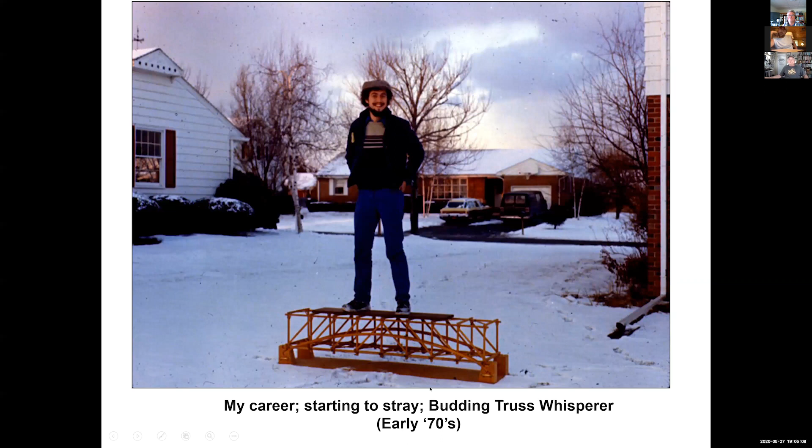So here you go, here I am. In the early 70s, going astray, becoming a budding truss whisperer. As I built this model, I turned to my left - I can still see this model. Almost 50 years later, I'm looking at that same model. I actually cut my fingers in the power saw building that model. That's why I've got them stuck behind me.

We used the model to demonstrate, and here I am in 1973, reinforcing a 100-foot long covered bridge in north central PA, still there. In Pennsylvania, when you needed a 100-foot long bottom chord, you didn't just go cut down a 150-foot tall tree like you can in Oregon. So you had to splice the timbers for the bottom chord.

If all of structures is challenging in making connections that are sound, it's particularly true in timber, and particularly true of tension connections. In this instance, these chords were all completely sound - there was no rot, they were well protected and covered - but at the lap splices, many of them had sheared. So rather than replace and dismantle this whole bridge, we simply reinforced them with these Dywidag threaded high tension rods, both inside and out of all four of both chords - four sets of rods running from panel point to panel point to panel point, covered it back up, and now you'd have to be a troll to see what we did.

So there I was getting started. Here I am, and this is the talk we're going to talk about tonight: heavy timber trusses. Let's define them. If they're not 20 foot or longer, I'm really not interested at all. And you're more likely, given the size timbers that people seem to use in trusses these days, you probably got a beam really anyway at less than 20 feet.

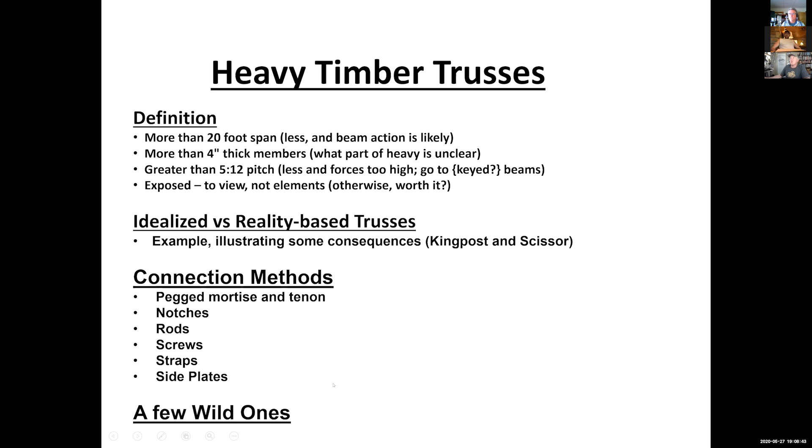I'm not going to say a lot of nice things about side plates, but I'll do what I can. I'll warn you about the side plate trauma. And then we'll talk about a few wild trusses.

So what about an ideal truss versus a real truss? An ideal truss is one where all the members are simply axial members. There's no eccentricities of the joint—all they feel is axial compression or tension, and they meet and end at every joint; when you connect them, all the members end at that joint. It's usually a pinned, friction-free joint.

On the other hand, our real trusses—a lot of times it's very bad to have all your member axes intersect at a spot. It makes the joint needlessly tough and unduly weakens the member that's catching the other diagonals. So a lot of times we use eccentricity to good effect, but it is not the ideal.

Most of the time we'll see at least continuous top chords, or rafters as I'll hear them called. So you have continuous members, which are not the ideal. I'm not saying ideal as in platonic—I'm saying that this is the simplest model.

Our joinery can carry, depending on how we frame it, all sorts of moments and shears inadvertently or on purpose. If you use side plates, this is where you can really get yourself in trouble, because instead of a small friction-free pin joint, you've got this big plate, which can be big compared to the trusses and members, and can transmit all sorts of moments and shears that you didn't see coming—and you're not going to detail for it correctly, and you're going to get in trouble.

We also describe our members as weightless. Obviously, nobody's doing weightless members except in SketchUp. I said everything stands up in SketchUp so far—when SketchUp starts getting gravity mode, I'm probably out of work.

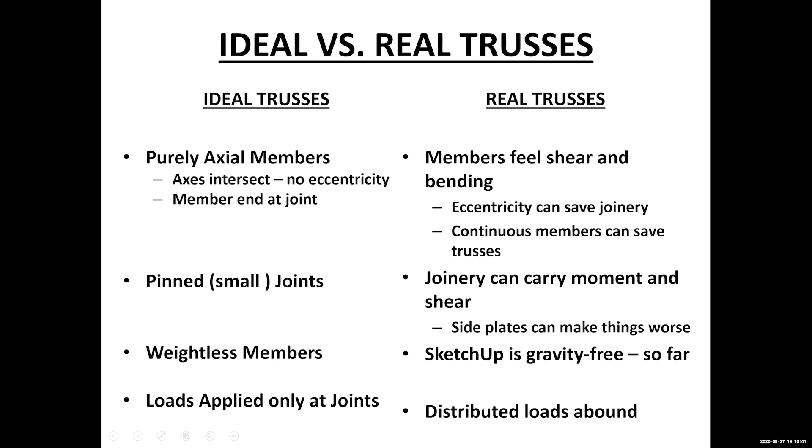Finally, classic truss analysis assumes that the loads are applied only at joints, not in the middle of members. That's the only way you can keep them purely axial members—applying loads only at joints. We violate that almost all the time, but I'm going to show you what happens when you do distribute loads in various ways. So let's look at some trusses.

This is an ancient truss, probably somewhere in England—this is a Janet Kane slide. I'm saying this thing is just barely a truss. I mean, it's got a big triangle, so sure, that's trussy.

These don't meet together in a triangle. There's sort of a frame—we'll see these again. But more than anything, we also have a strut that looks like it's been there for a long time, so this is probably as much a structural handrail or a top plate of the transverse wall. But the location of these diagonals can play a crucial role in how forces are transferred throughout the truss.

So let's look at this. This recently came in—this is from one of our members, a longtime member of the guild and former president. I'm not going to mention his name, but Scott Murray might be on the call. He sends this to us knowing full well this is not an idealized truss, but it sells, and who can argue with what sells? So he wants us to engineer this for what sells. I tell him, Scott, this is inefficient. He said, I understand, shut up and do it. I said, fine, Scott, here we go.

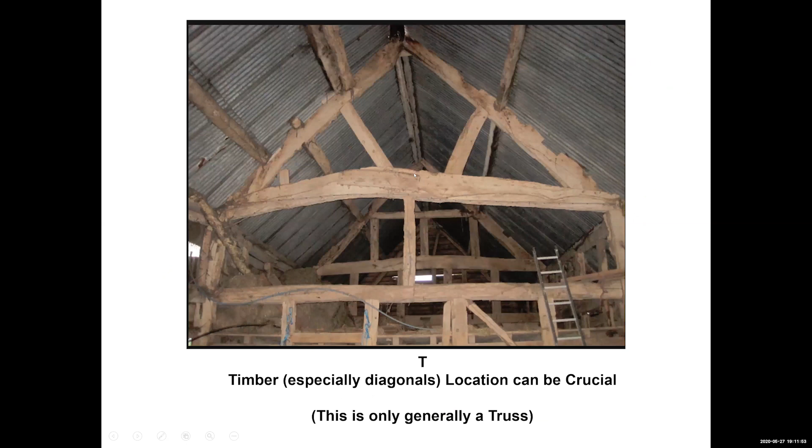So what happens when you put the struts perpendicular to the rafter, not at the midpoint—you put them at the rafter, you leave a longer span down here than up here. And what happens when you separate them from the middle? You've got a king post or king rod, unlike the previous one. You have a king rod here to handle the tension imparted by the compression in these struts, but you've got a lot of shear in this bottom chord.

As a matter of fact, for this to work—he sells them at 8x16, so that's good in Canada and Ontario, that's great—they do need 8x14, and because of the increased bending on this side versus that side, we needed 8x12s for the same loading.

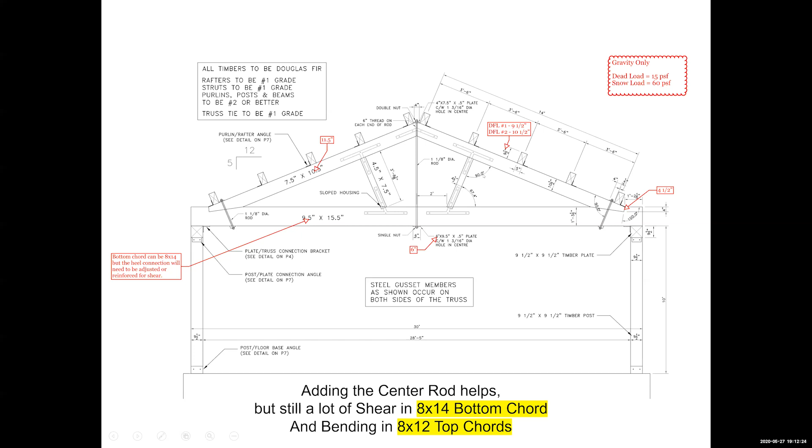On the other hand, just for interest's sake, I said, well, what happens if you did this? If you flattened out the diagonals so they're basically at the roof pitch, so they come down here, they take off the shear in the bottom chord and support the top chord evenly. What happens? Well, all of a sudden, because of the more even bending in the top chord, they can go from 8x12 to 8x10. And the bottom chord, without all that shear—it really is just a tension member—can go from 8x16 to 8x10. Big change just by a modest tweak, and all I did was flatten out the pitch.

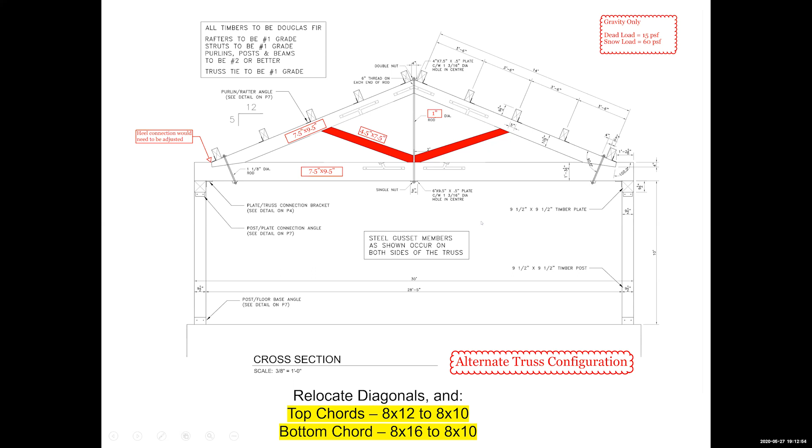Okay, so you bought 2 feet longer diagonals. You can send me the bill. So here you are—this is a big impact and shows you how the orientation of the members really matters a great deal. So this is what I would call an ideal king post truss.

Some of the things going on: this is a 12-12 pitch, but that's also a 45-degree brace, so the brace is parallel to this, which means when it comes off pretty close to the bottom of the king post, it hits the top chord roughly at mid-span. You'll also notice it does hit the king post—we're going to talk about this in a second. It doesn't hit down in here, which would be a concentric, non-eccentric connection, but it would also mean I'd be shoving the bottom chord off the end of the king post, and I would have to detail this. Sometimes you see big through-tenons in here and straps around the outside and all sorts of stuff to hold a lot of tension between here and here.

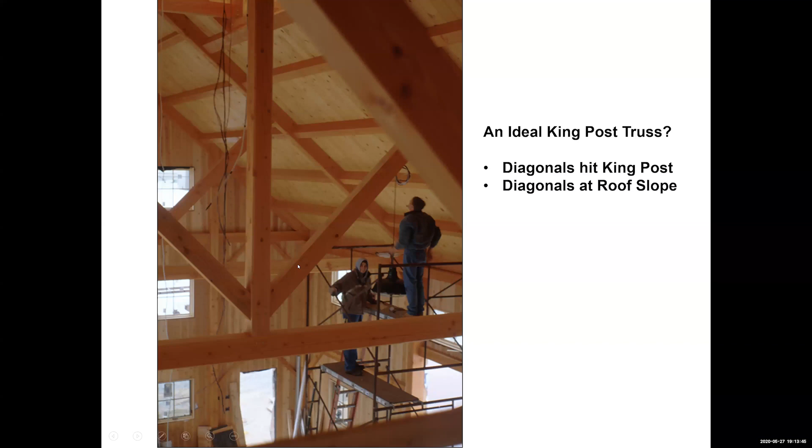It's only because sometimes people will put these diagonals down in this crotch here, and that shoves this bottom chord off there, and you have to detail accordingly. Or you can go with fairly simple joinery if you keep it up here. Once you've said, well, gosh, once we're going to get the tension—or the bending—out of that bottom chord, then you could actually just go to a simple rod across here.

And this is another slide from Janet. This is a rod, because all it's really doing is handling the tension of the king post upper part of this frame. I'd point out this frame is really an interesting frame. This is a rod—you've got to keep it in tension, and we'll talk about that. You have to either use a flat pitch, so there's a lot of force in this rod and it doesn't get reversed by wind loads going across the top of it or by earthquakes shaking it up and down. This cannot handle any compression—it's only a tension member—or you can put a lot of heavy load on it.

We'll talk about one where we did that. I love this frame because it's called dogleg framing. This is what I call dogleg.

This is a moment frame: a link of a rafter, a post, and a long brace, imparting lateral stability to this frame. This is a dogleg, meets a king post truss, and not only that, it does it with floating posts. Notice how they floated the posts off the walls. We don't need no stinking posts on the walls.

We get them out here free. The kids can run around behind them. You can put bookshelves and all sorts of stuff out here. It leaves you room for a really great joint here.

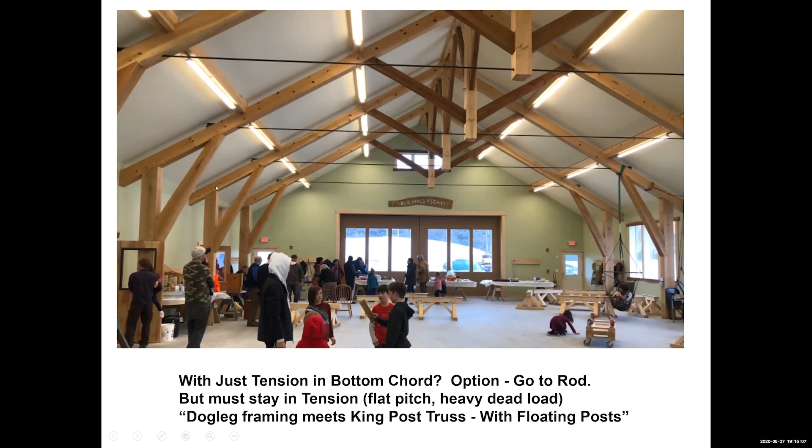Instead of having to cut this rafter off right where there's a lot of prying induced by this brace, rather than having to cut this off because it ran into a wall, I can keep going over. All of a sudden, this joint is ever so much stronger now because I've got decent end grain on the rafter.

So if you really take this to the extreme, we don't even need to connect the king post to the bottom chord at all. How bold is this? I looked around and I've seen this in a slide somewhere, like Macedonia or someplace, from 4,000 years ago. Somebody did it and got away with it for a couple thousand years. I could not find that slide, so I had to use this one.

But that just goes to show you, if you detail this diagonal right, hit the king post and keep it in parallel with the roof pitches, there is really no tension here unless you start hanging heavy objects. If you start hanging heavy objects off here, swings, lights and stuff like that, then you better detail that for some tension, because that's a long span as a beam. It's fine as a tension member, but it's a long span if it's a beam.

So now we're going to get into comparing various details, and this is where Janet really kicked in. We're going to talk about detailing trusses and what the impacts are on the force transfers among them. So we're going to stick with a 36 wide.

Trusses are getting interesting at 36, 12-foot bay, pretty classic, 9/12 pitch, 15 pounds dead load over the slope. We'll show you that. 16 pounds wind load distributed, we'll show you that too, but it's completely secondary. I'm really here for the gravity loads. Then we'll talk about snow load.

I just picked a nice 40 - or actually Janet picked a nice 40 - but what we're really going to be looking at are the different ways that you can apply the load to these trusses.

A lot of us use common purlins between these things at 4-foot centers. We'll show what happens. Some of us just put up heavy, thick boards or 12-inch SIPs that can span from truss to truss across that 12 feet. Heavy decking can do it. Some people put lumber, 2x6s or 2x10s or 2x8s - I guess I'd use 2x8s at 12, 16 inch on center.

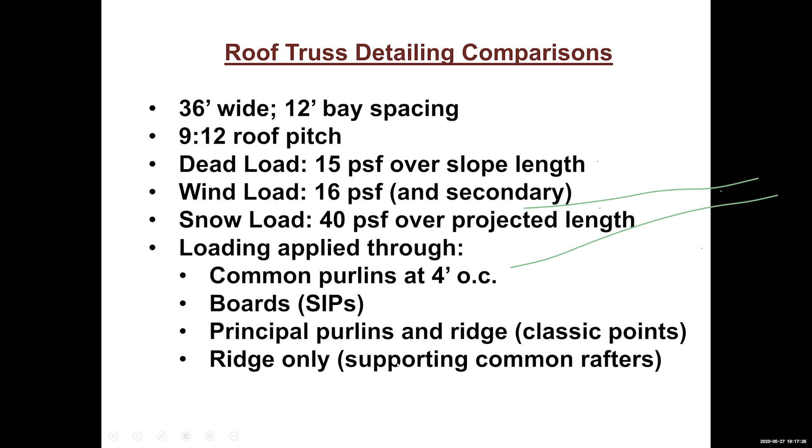So here's the classic king post. We're leaving the braces in, even though they're probably as much trouble as they are good. But there it is - we're going to have an 8x12 top chord. We didn't quite match the pitch, but close with 50 foot or 50 degree. It's not a 45. There's your diagonal.

Notice I downsize them so that this is not a flush joint and this is not a flush joint. I like to do that a lot. Sometimes I'll even make this an 8x10 spun the other way so that you're looking at the 8-inch face, so this bumps into that. There's lots of games that I play to avoid flush joints, which don't hold up very well. But we're going to see dead load distributed over the timber.

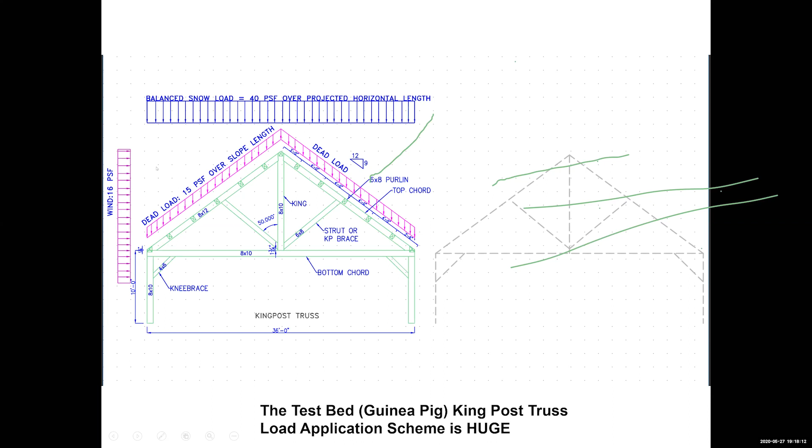We're going to see snow load distributed as it was if we're on the ground but hitting a roof, and then we'll look at wind load, which we're doing the simplest of wind loads, just a projected area above the half point of the wall. So let's see what happens.

So this is if you use classic purlins. You'll see if the purlin's on 4-foot centers, even one down here—see, this is about half of it because this is 4 feet, so only 2 feet of it goes directly into the post. This is a little less up at the king post, up at the ridge, because these two are a little closer than 4 feet to the peak. So the spacing isn't perfect, but you'll notice that most of these are small 2.5 kip loads.

And what we need in order to have the top chord handle this is an 8x14 top chord to handle bending and axial compression, the combined stresses in this chord. We need an 8x14, we need an 8x10 down here, an 8x10 for the king post.

Notice that the king post has 9 kips of tension. What's that from? I've got 7 kips in the diagonal propping the sag out of that top chord, 7 kips in this diagonal propping the sag out of the top chord. Those are in compression, propping the top chords up, pushing down on the king post. So these rafters, these top chords have got to hold that king post up with 9.3 kips. And we'll talk about that joint eventually—how we're holding that king post up with this rafter. And then the bottom chord needs to be an 8x10.

So there you are, that's classic. Pay attention to this: the top chord has 20 kips of compression, the bottom chord has 15 kips of tension. 20 kips of compression in the top, 15 kips of tension in the bottom.

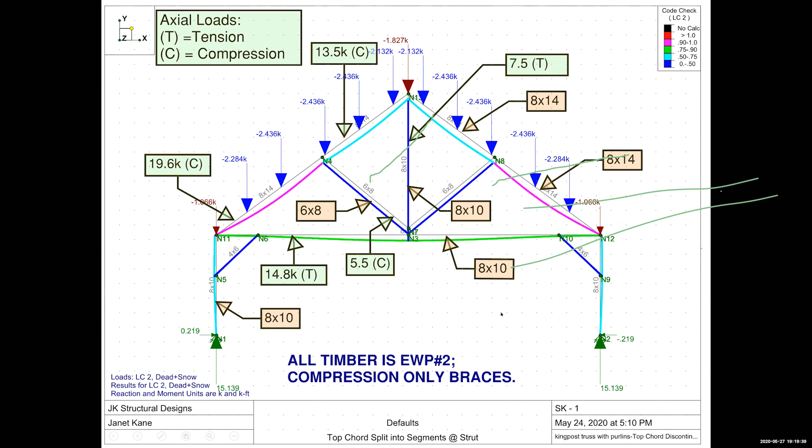So this is one I've wondered about, and finally talked Janet into doing this for me. This is really for geeks. What I had her do is say, what is the big deal about this chord being continuous to that chord? What if we put a hinge here and didn't carry it continuously across?

It's kind of interesting what happens—your bending concerns aren't, because we didn't quite flatten out the roof pitch, the bending concerns are now only down in here. And you'll notice also what happened, which I looked at, and because I'm such a timber geek I can just stare at this sort of stuff.

You'll notice I've got 5 kips of compression in this strut when I do this, but when the chords are continuous I've got—where is it? There, 7 kips of compression in that strut. So why, what—I put a hinge in here, I cut this into 2 separate members, and my load goes down here? Well, actually yes, because this is a continuous span across here. So part of what this compression strut is doing is not just taking the deflection out, but inducing flat curvature in there. You're also pushing this straight in here.

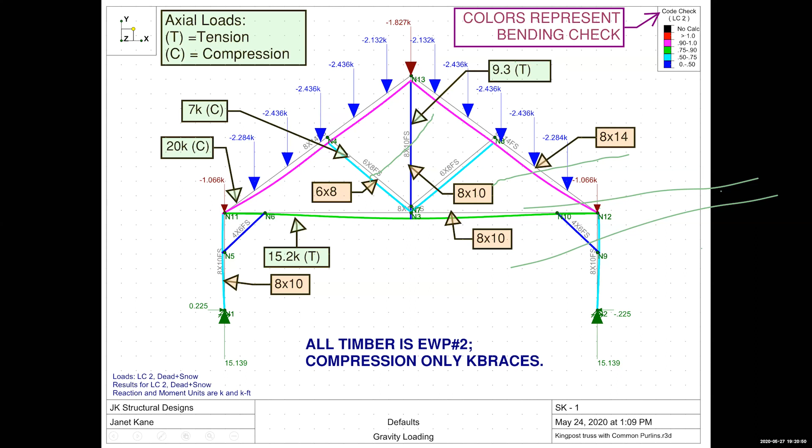Another way to say it is a continuous span has a 5/8 reaction instead of a 1/2 reaction in the middle, for you engineer geeks. But the fact that this is continuous across the support means there's more force in the support than in this instance, where it's 2 simple spans across there. The force in this goes down. You'll notice the tension here and the compression here, almost no change at all—all it really did is a little bit of change right in here. So that's enough of the geek stuff.

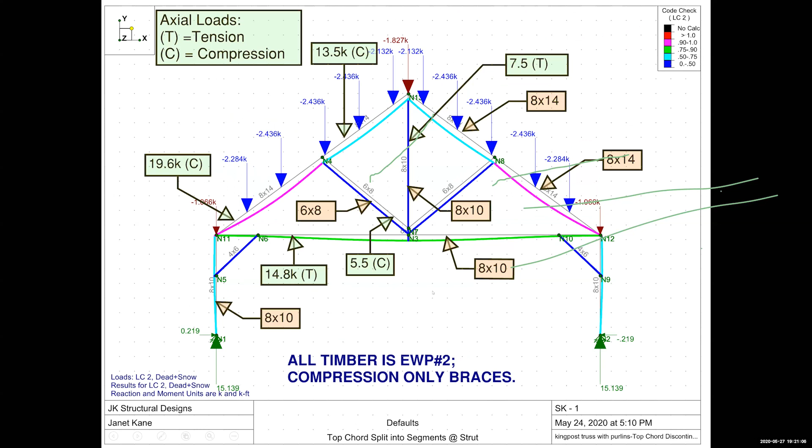Let's go to the next one. This is where we've got either panels or boards or something in here distributing the load. And look what happens here: in order to get this top chord to work with this load spread all the way along here, and that's both the dead load and the snow load up here, this top chord had to go to 8x16.

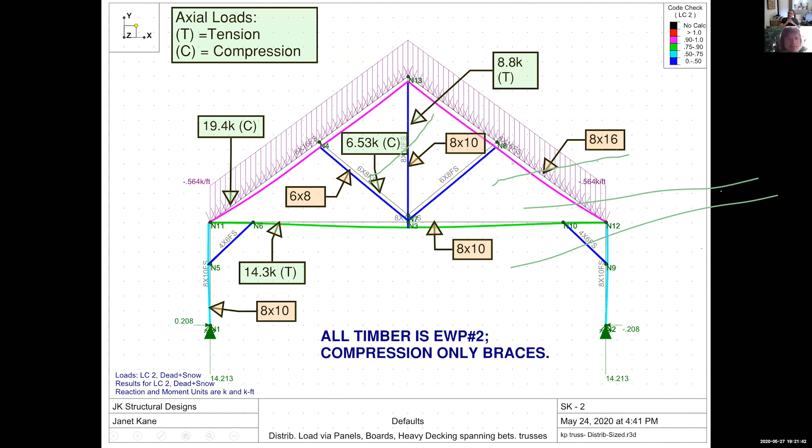You'll notice that the compression and tension didn't really change, it's still about the same, 20 and 15. But this had to go up to an 8x16 to handle the extra bending. So what's really paying the price is your top chord if you're distributing these loads this way—if you're using purlins and boards, and what was the other one we had? Purlins, boards. We're getting to the next one.

Okay, and then how about if we do the principal purlin? This is a principal purlin. Well, there's an eave purlin—look right away, the eave purlin is taking a lot more load now than when the purlins were at 4 feet on center.

It took 1 kip away. When we put the purlins here, here, and here, you'll notice we got 3 kips that are completely off the table anyway. They're not getting to the truss at all. Then I locate them, locate a ridge up here, the common rafter or boards go up here, or panels go up here.

This is a pretty ceiling, that's my favorite ceiling, and then I have this big load, but it's right here. Look what happens. My top chord, the king post can only be an 8x8. The top chord can go to an 8x10, and the bottom chord can be an 8x8. This is the most efficient way to load this truss.

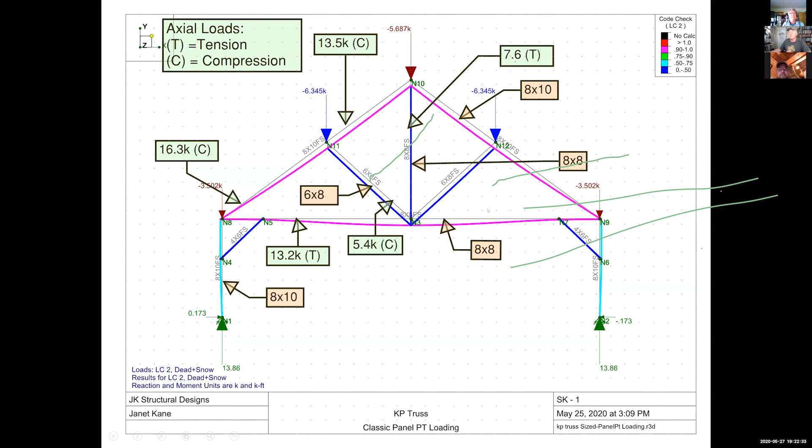The next step out, it's really the same truss, but we're going to have a ridge beam on top of this thing, so the rafters span from the ridge down to the eave. What happens there, a lot of load just goes right to the eave right off the bat. So by now, instead of having 20 and 15, now I'm down to 11 and 9. Well, that joint just got an awful lot easier to load.

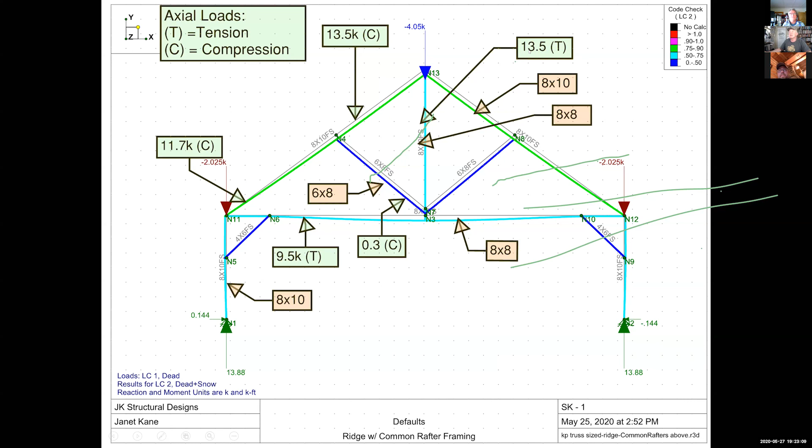You'll notice, and we could talk about this but I'm not going to, you'll notice you still have quite a bit of load in the king post, quite a bit of tension, because these are still working pretty hard.

Okay, so let's talk about these - I don't count on these, but they are handy for holding things up while the real lateral load components are being installed. So what about these knee braces that jam in here?

Well, if you put a realistic side sway on this thing, if you really are building a dance hall or a church, and you're putting the braces in here, say I've got a tension brace, some sort of knee brace that can handle 4 kips of tension. That's a lot - that's 2 big pegs and end distance to help develop it.

Then it's still going to sway an inch sideways, probably more than anybody wants it to do in a wind mode. If, on the other hand, you're more realistic and say this thing fails - look at it, I don't bend that post anymore, but I doubly bend this post, it's in trouble, a lot of trouble - my side sway goes up to 1.8.

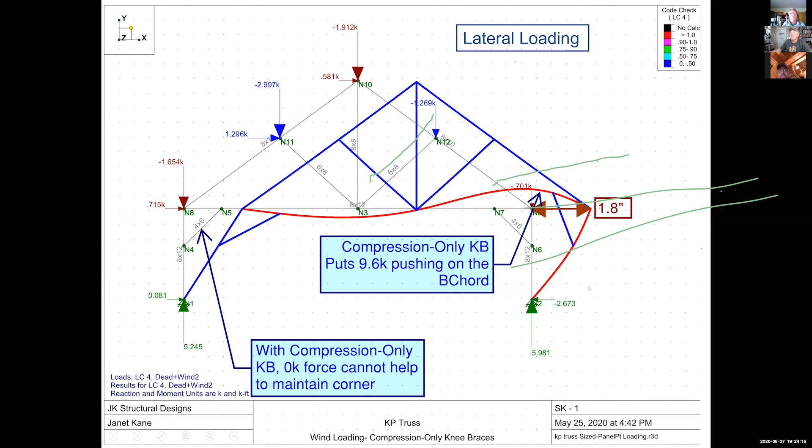So I'm not saying don't put these braces in. I'm just saying that you're working the post hard, and you're also cranking on a bottom chord, which might not be big enough to really do a stiff job of it. So you can be breaking bottom chords with these braces too, if you really think they're carrying the load stiffly enough.

So what about scissors? How bad does this get? I tell people the minimum force in the bottom chord is going from here to here. If you raise these, if you break it into 2 separate bottom chords and raise them up all the way so they're parallel to the upper chords, the tension goes to infinity.

So if you're halfway there, if you're from 0 to 4.5 to 9, you're halfway to infinity. Well, infinity over 2 is still infinity, right? So obviously I'm lying to you, but you are not being efficient.

Look what happens when we use these same spans, the same spaces, same loads. Watch what happens. It used to be 20 in the top chord and 15 in the bottom chord. And before I leave this, let me say this about this king post.

We'll see why, but this - if you have to leave this out for whatever misbegotten reason, brace yourself for trouble. This king post is seriously in tension. It's what makes this a truss - 1, 2, 3, 4 triangles - and not some frame which bends these poor bottom chords and bends the top chords.

Oh my, I have done it. I am here to tell you, if you have only one thing you take away from this talk: do not allow yourself to get talked into just leaving that member out because somebody thinks it looks cool, or wants to run a big duct down the middle or something.

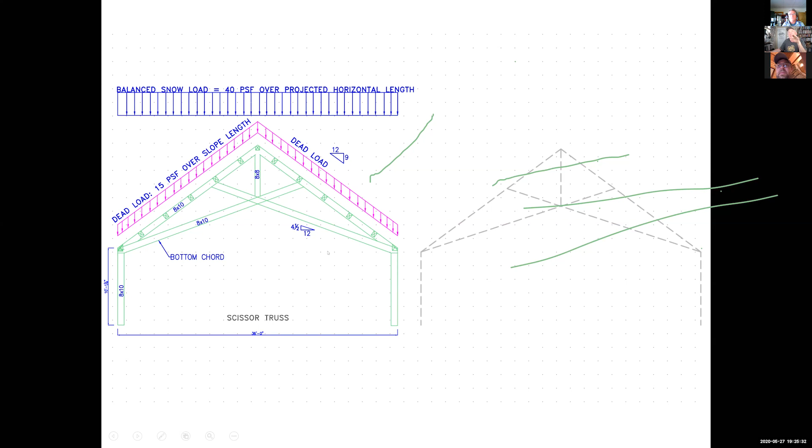So here you are - what happened to that bottom chord? The top chord was at 20, now it's at 34. The bottom chord was at 15, it's almost doubled. We've almost doubled. We're not halfway to infinity, but look at that.

And then the top chord and the king post, that used to be like 8,000 pounds or 8 kips, it's tripled, because now it's handling compression from these weird sticks, and this is the crux joint.

This is the tough joint. We'll talk about this joint. This is a tough scissors joint.

Sometimes I'll leave these timbers out to make it just a 3-way joint. If you have these in here, you've got 5 members coming together in one spot, and they've all got a lot of force - this one's in tension, this one's in compression, this one's in tension, this one's in compression. This poor timber changes from big tension to some pretty good size compression, and just on the other side of that, there's a lot going on in this joint.

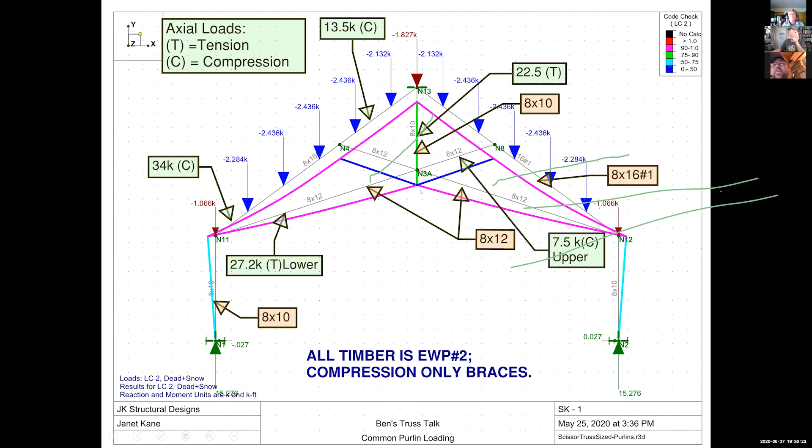Take this joint very seriously - that's one of the ones you've got to pay attention to, the king post tension. So that's enough about members and orientation.

Let's start talking about the connection, because trusses, to some extent - if Dennis Markham's on the call, there he is - these are the 72-foot long single bottom chord pieces of the Proctor Academy in New Hampshire.

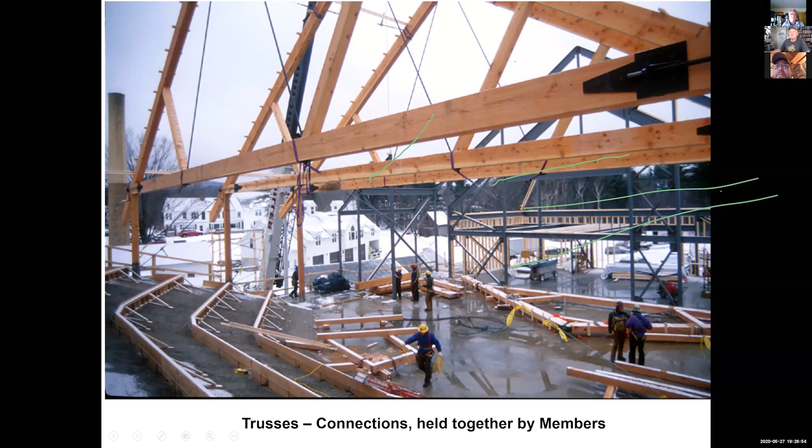They promised us we'd be raising this thing in summer. This is when the GC finally called us, but you've all been through that story. So let's talk about connection methods.

So there's mortises and tenons - that's what most of us got in here, that's what I studied in graduate school. But they really have limited capacity, and whether they actually justify the damage they do in a well-engineered, well-designed truss is running pretty efficiently. When you start taking housings and tenons, mortises and pegs out of there, you're really doing a lot of damage.

We're going to talk about notches. These are classic - notches are timeless, but they are compression-only members, and we'll talk about that. They do weaken the timber at the notch, and craftsmanship is involved.

You need nice bearing, and bearing changes is the problem with dealing with wet timbers that are going to dry in place, because the angles change. So it really relies on nice craftsmanship.

Some of these will have cast iron standards to sort of industrialize and standardize the notches. You'll see some of it, and we'll see some of these later.

Rods, I call them priceless because they're tension only. You can look at it and tell what it's doing, what it should be doing, and all it can be doing - it's not going to be fooling you. It's not going to be in compression. You can tell when. I love rods for their clarity of vision.

Screws have only been a recent innovation. So far I mostly use them to reinforce and repair and hold stuff together while we're tipping it up.

The simpler your load paths, the better. These are a straightforward load path - mortise and tenons aren't, but a notch is very straightforward. Rods are pretty straightforward, screws are remarkably straightforward, these straps are very straightforward. They only do one thing and they do it well, and they're not going to surprise you by carrying things like side plates, which are fraught with issues that can transfer all these unforeseen things.

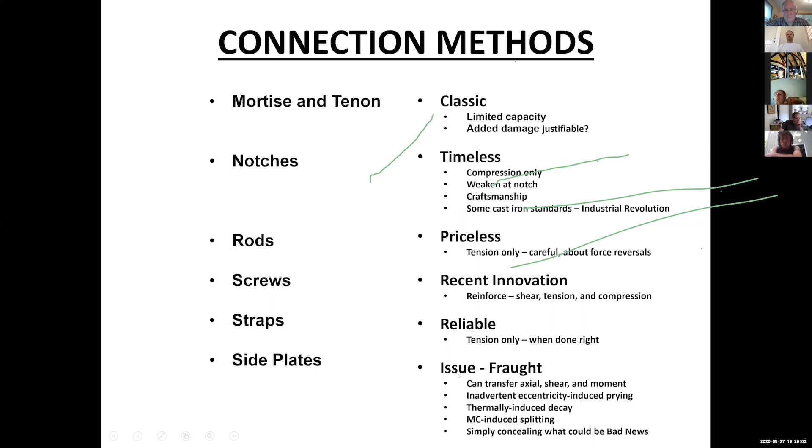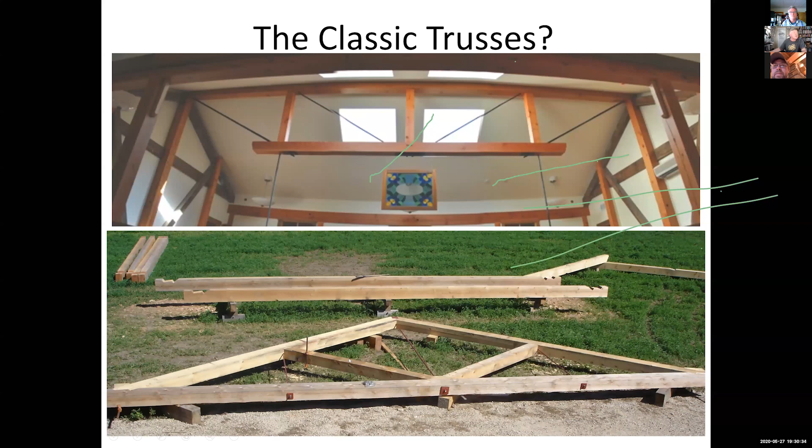Very elegant joint. So this is connection basics. This came out of a text, one of the texts I keep right here. I can grab this thing. This is one I used when I taught undergraduate and graduate level timber structures courses. It's Hoyle's Wood Technology in the Design of Structures. It is so focused. It was the most design oriented of what I consider the American books.

And it points out this crucial, simple thing that I see people miss all the time. Here's a truss, here's a truss. When it comes down, it sits on a wall. Top chord, bottom chord, same compression, same tension. People don't look at the joints. What's the difference here? In this one, the top chord sits on the wall. In this one, the bottom chord sits on the wall. Is that a big deal?

Let's look at how the force is transferred between those two members. When it's located like this, this member is simply sliding by this pin, and this is loaded parallel. The top chord is loaded parallel to the grain. All it feels is that.

But on the other hand, the flip side of that P down here, when this connection feels the support, the bottom member feels the support, but it also feels this angled load from this pin. This pin is parallel to the load transferred to the pin, parallel to this one, but it's at an angle to this one. On the other hand, when I support the top chord, and now the reaction is here, there's only simple tension here. This is just the simplest tie as it can be in this member, and that member now feels the load that's parallel to the grain, and this member feels the load that's at an angle to the grain.

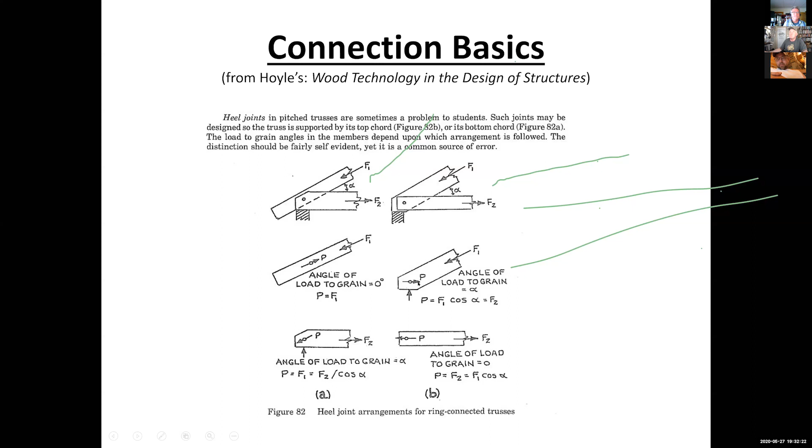If you don't think that's the difference, you haven't been paying attention. You've been getting away with stuff, if you don't think there's a difference between whether this is loaded at this angle or this angle. Now, when you use lots of little connectors, it's not as big a difference. When you use lots of little screws, or a lot of little pegs, they don't really behave that differently when they're loaded perpendicular to the grain versus parallel to the grain, but you're not doing that much when you're using bigger pegs.

This is a fascinating joint. This is a double stepped one, and it's double stepped into both. It's a sandwich. You're looking at 6x16 rafters, and you're looking at 6x18 that sticks out through the top, and that is split ringed.

This is split ringed, and this one is split ringed into the two bottom chords, and then these two notches go across all three of these members, the three in the top sandwich and the three in the bottom, and then they're bolted together, and there's a pin right down here at the concentric point where the thing is supported and the lines of action of these two chords meet.

This is a fascinating joint. It really is. It combines this, and this. How load sharing happens between here, that's a good question.

I would certainly want these to be split rings and not shear plates if I wanted this one to carry load, and see that looks like it's a split ring or a shear plate. The problem with the shear plates is they let this centerpiece slide a little bit, so this isn't going to be uniform bearing across these two patches. But on the other hand, split rings are much stiffer. Load transfer is much more immediate, and you would have more even load sharing between the three sandwiches when they get these two notches.

Now, what about these two notches? These are crucial notches. Each one has to be nicely parallel to the other one. Has to be a nice uniform bearing, not tight here, tight at a corner. Not only that, but all four faces have to be carefully cut so that you get uniform and simultaneous bearing across all these faces.

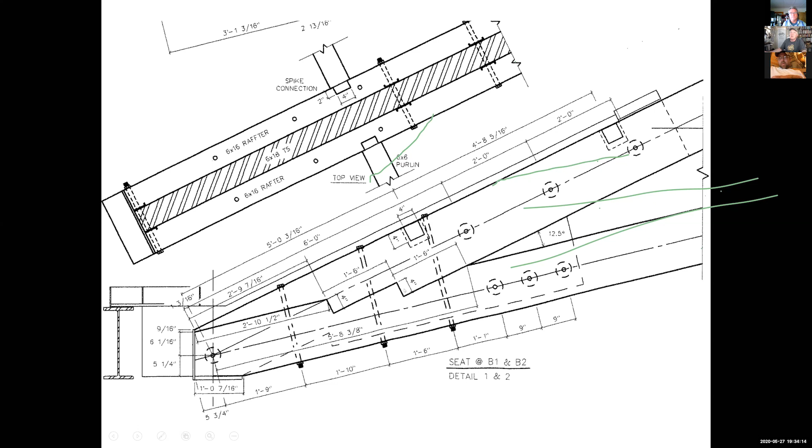A good trick, sometimes what I'll do is undercut one and drive a pair of wedges in there, drive them in hard. Now the problem is that crushes, so the load sharing doesn't stay even. But if I have any concerns about the capacities of the timber framer to do it, I'll have them put wedges in one of these.

Ben, may I interrupt you here? We got a special request from Janet that you remove the green lines, it appears to be distracting. Yeah, I know, I can't. I don't know, okay, maybe they don't show up on any screen, so I don't know how they got there. Can I apologize to Janet privately later? Well, we'd rather it were public, but yeah, okay. All right, I'm sorry, Janet, I don't know where they came from. Sorry, babe.

So let's talk about this. This is a plan, this is a scissors truss, and they just slapped this on the top chord and the bottom chord, and said well, 6 bolts is fine. This has probably got more load in it than this one, so why is this and this? Who knows? The problem is we don't know what the load transfer is between them, because this is an eccentric load path.

And I'll show you why this is an eccentric load path. So this piece of steel is being twisted out of here, and why they didn't just cut a simple little notch in here and be done with this thing and some screws, I just don't get. But we don't trust notches in engineering school, apparently. So there's a PE seal on this thing.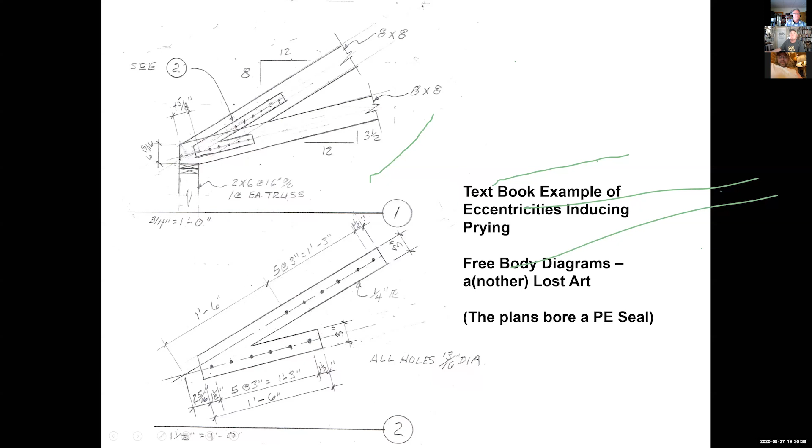Notice it could be, if I brought the plate down here and grabbed it and had it bear right on the reaction, maybe you could do that. If these plates actually bore on the support too, then it'd be more complicated, but in some ways a much simpler steel strap. Then I'd have compression, tension, and the support reaction. But they just put these on here all the time. And just because it's cut into a fancy elbow doesn't make it the same thing as if it's just a big old triangular plate. So here you are.

This is what's really happening: let's say it's supported in a way that this is in pure tension. Well, these are fighting it exactly, they are at least in balance, so the thing isn't going sideways. But that is an eccentricity, because the center of these 3 bolts misses the center of action of these 2 bolts, and that's the eccentricity between this compression shoving this way. So this is simpler but more accurate, but this isn't anywhere nearly the case either.

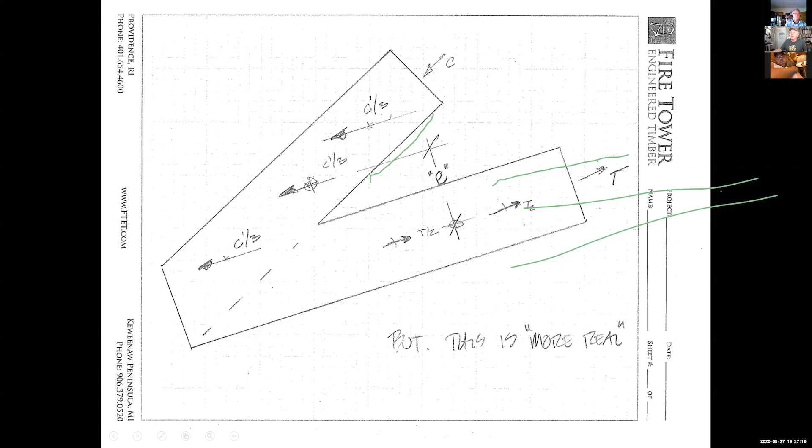Each one of these things is going to have a perpendicular component to keep this thing from rotating about either here or wherever you choose to rotate it. There's going to have to be perpendicular components, which are basically, another way to look at this: if you push hard on this, you're going to pry this out of the end.

Now, one of the ways you can do that is to move this pattern of bolts down here so this line of action passes through the center of line of action of that. Then all of a sudden you've gotten rid of that eccentricity, and we'll show you how to do that. But if you're stuck sticking these things all on the upper side of this line of action, you've got eccentricities.

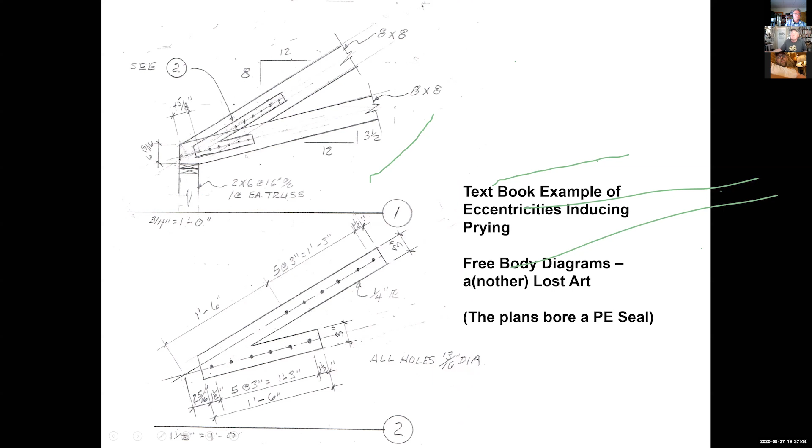So here's what we did on this one. Here are pins. These are separate straps. That's a bolt that bolts this strap to this strap. These things are really held in by dados, so that's a dado bar set into a dado face, with 2 bolts that go through and clamp, and a pin here. When this thing is centered, there's a pin here, a dado bar here and a dado bar here. So this line of action of that tension, that scissors truss, passes through the centroid of the line of action of these 2 dado bars.

So this is using straps. They look like a cover plate, but this is really a pair of straps designed similarly, an overlap set of strap - I think that's a Y and a vertical. This one's not so critical because it's pretty symmetrical innately. But this is a way to get rid of the prying in here and use straps. I kind of like the way it looks. This is not for everybody.

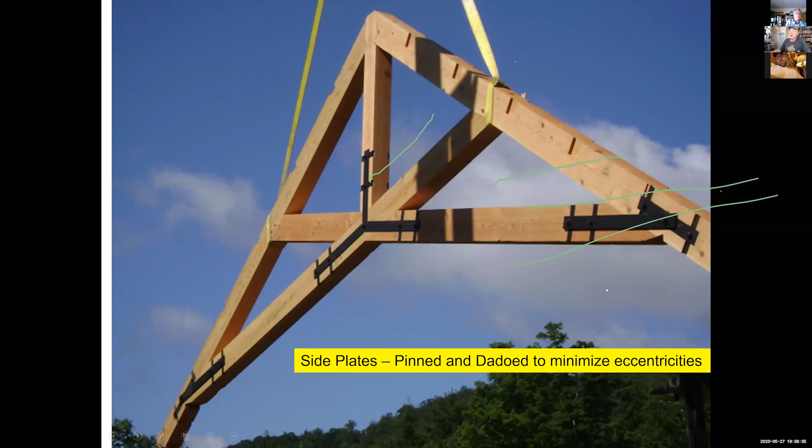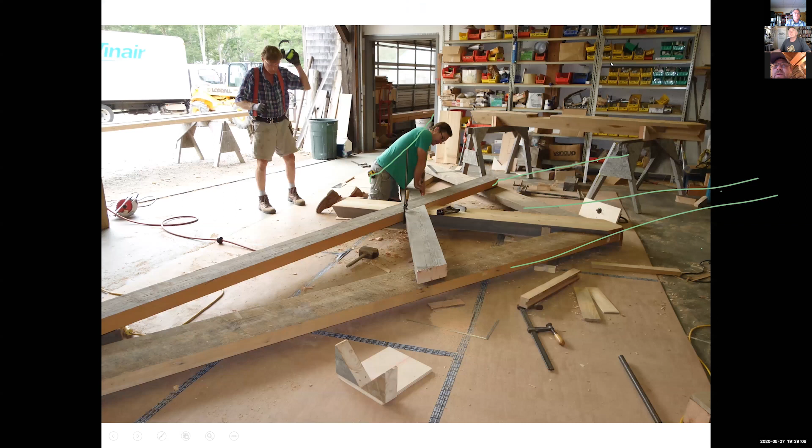Oh, am I doing things by... no, that's not it. I wondered if I was inadvertently making marks. Whoa, I'm going the wrong direction. I was trying to make that green mark go away, Janet.

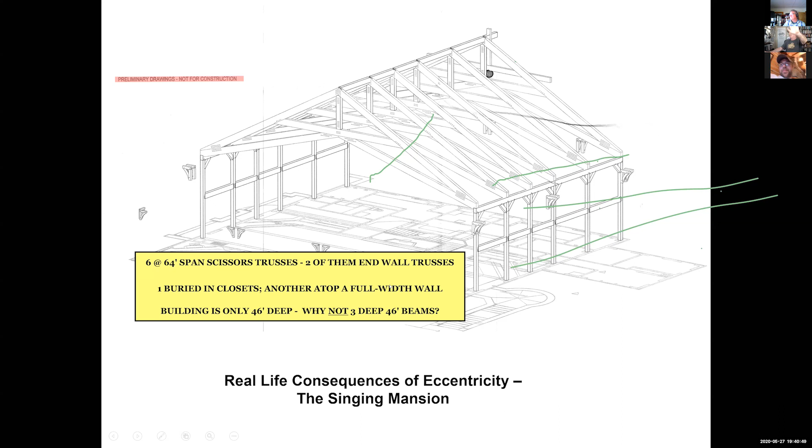But the thing was, here's what this joint looked like: 66 kips. I mean, this is a lot of force. 66 - you know, we've built houses that don't weigh 66,000 pounds. All right, so we've got houses out there shoving through on this steel plate, and it's full of pins. These are all 3/4 inch pins going through a single plate. I think it's only a 3/8 inch plate too.

This is eccentricity. The load, most of the normal force here, is in bearing along this face, but there's a big amount of 60 kips of shear going along here. Notice the line of action here is 10 inches away from the line of action there, so this plate is being spun counterclockwise too. This isn't a whole lot better, but that's a lot of force.

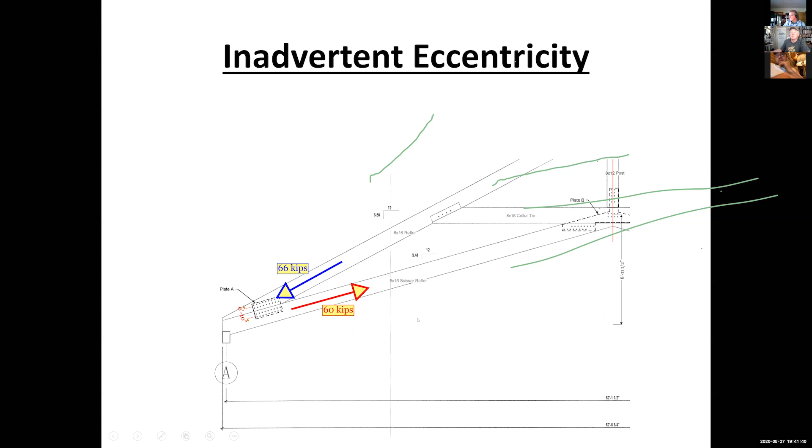This thing creaked and groaned and snapped and cracked, and it was 8 years old already, so it wasn't drying anymore—things were moving. So what do you do? We tried to come in with screws, but you couldn't get to them, couldn't come up with long screws buried in walls, couldn't come through the top. It was a beautiful clay tile roof, so it had to be face-mounted stuff.

These face-mounted straps look like individual screws. That looks like a big, long screw in tension keeping this thing from sliding and sliding. So that's the plan—they're on the inside and outside, both ends, I think 3 or 4 of those trusses. This was early in the days of these new European high-tech screws, so...

We thought, let's just go see them. Besides, the client could afford this, and we really wanted to know what we were doing, so we built up some models. We ran them at different loads to the grains, simulating these screws, and put them into the same steel plates. We did this for a couple of reasons: we wanted a proof of concept—these things are worth like 2,000 pounds of screw, come on—so we wanted to see that we believed that.

We wanted to see what a failure mode looks like. Mostly I wanted to be able to tell the builder and anybody else who comes and looks at this thing: if you start seeing these heads rotating this way, you've got a problem. We wanted to leave a track record of what the failure modes look like. The builder who was going to install them came down and learned a lot about what kind of impact tools were needed, whether you needed a pre-drill, what to expect, how long it's going to take, how heavy these plates are going to be, and what these screws are going to feel like.

Then, of course, the engineers had a lot of fun, and we made some money on this job. So there it is—this is undoing. Unfortunately you can see the pins; they plugged the pins, they were small pattern pins. It wasn't a bad idea, a bunch of small connectors, it was just way too few of them with way too much eccentricity.

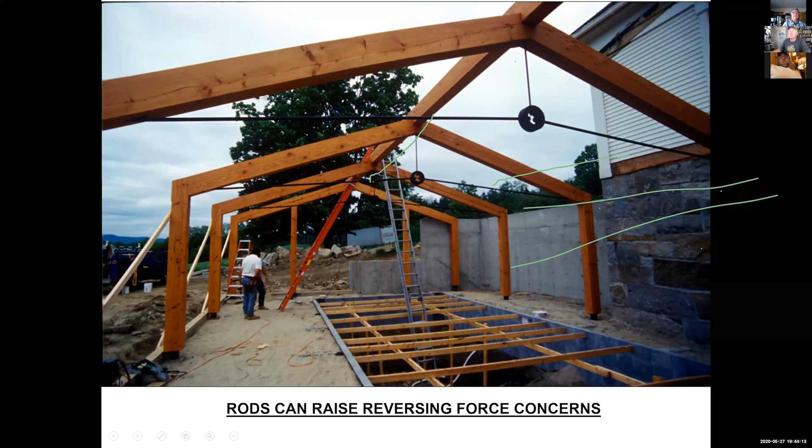But if wind came in and lifted this thing up, these things would rattle and clatter, and it would be nasty. So let's think about this crux joint—here it is. Everybody wants these things flush, which means a half dado here and a half dado there, which means eccentric load paths around the dado, or it means you've removed at least half of the capacity. It means all sorts of compromising to these two timbers. But then I've got this serious tension—how do I get this tension into this?

How do I get this tension around these dados? I have drilled a slot down between the two dado faces, then this needs to get better.

Notice this was using up a bunch of leftover recycled planks that South Mountain had out. For a couple of years, I was coming up with ways to use their overly optimistic purchase of a lot of recycled Douglas fir planks, heavy planks. Here we are. So this is what I call a clasping king post.

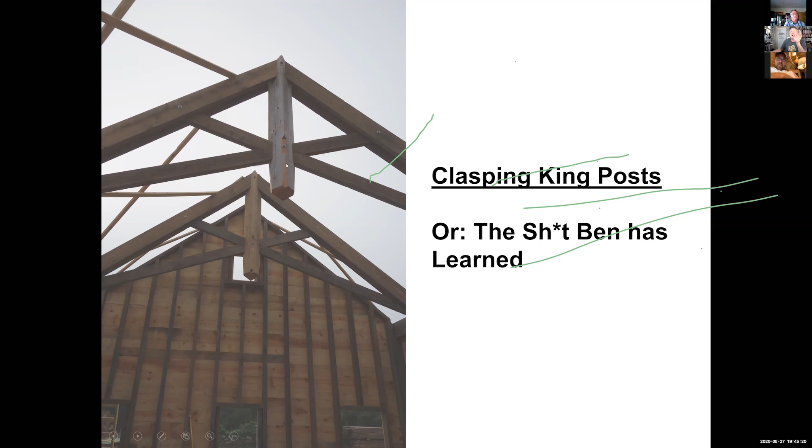We've got a simple bird's mouth up here, but then this clasp goes around, it's split, and you'll see this in a second. It's split so that this is actually compression, nice cushion compression bearing on the underside of this. We're not damaging these dados any more than they already were. So there they are, and there's the split king post.

You'll see there's a dado in here where that's half a plank wide. The other one is half a plank wide. And so that's a simple bird's mouth down in here.

You'll see this joint in a minute. And then all the compression is on these two surfaces. So let me shut off my cell phone.

So here are the two together. After a while, I get bored with all this prismatic stuff, so I talked them into spinning the king post 45 degrees just because we could. And so there it is. They're clasped, and now they're going to trim this off.

We had a contest for what kind of detailing to use on the bottom of the king post here. A crucial amount of this gets hung below to handle the compression, on the other side to deal with the tension, and then a bird's mouth up here.

Let's talk about these, which I consider scissors trusses, really. They're just a different kind of scissors truss, smooth, with curved bottom chords. Used to be I didn't have to worry about these things, but then architects found themselves with CAD drawings, and suddenly it got pretty easy to draw a 28-foot diameter radius circle.

This is a scissors truss. The good news is that because this thing is radiused up, you generate more interconnection along here. Instead of when this is a straight member, that shear plane, the interacting shear plane, where you want to make your connections, you have more of it to work with. That's good news. The bad news is this is a curved member.

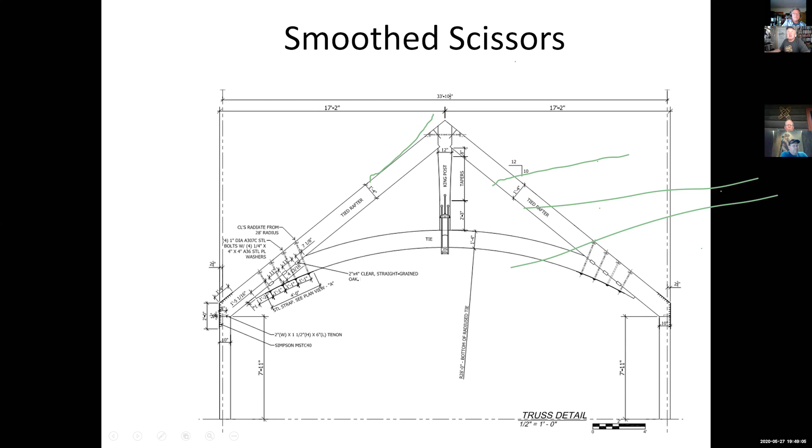So then what do you want to do? You want to do as minimum damage to this one piece bottom chord as possible. So the tension here, I could have taken a rod through here, or we could do, oh here it is, how to grab a curve.

By the way, if you don't recognize him, that's what's his name? Norm Abram, thank you. And this is his own house. And that's Tedd Benson. Don't do this at home, disconnecting the cord. Later, in the act of taking the shrubbery down off that same ladder, trying to emulate Tedd, he slips, the ladder falls out from underneath him, he falls off the ladder, hits the staging, rolls off the staging, and hits the floor. Another story.

So here you go. So how do you do the minimum damage to this curve? By not even taking a rod, not even anything more than a locator nub tenon. So you take this beautiful piece of wrought iron that looks sort of like a crown on the king post. Anyway, it goes down past the curved bottom chord and turns what is a tension connection into a compression member, because now these two wedges bear on the other side. So these things are sized so that you don't crush the wedges and you don't crush it, so they're wide enough you're not crushing.

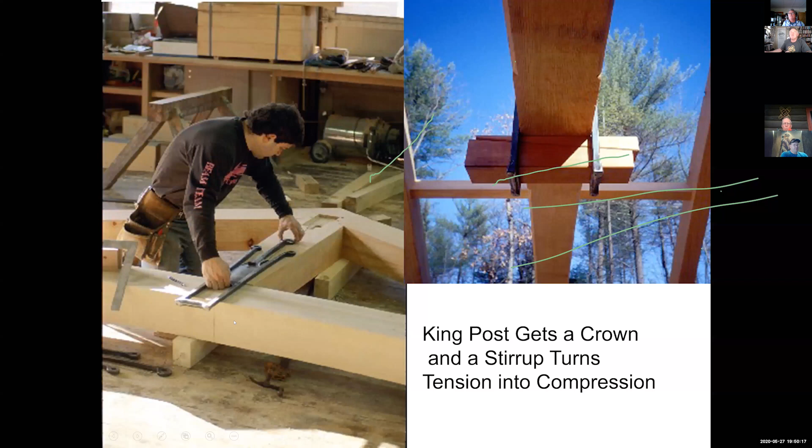And they're also deep enough so that they can handle the bending, because this is uniform load in here and two point supports over here. So these wedges are pretty exotically loaded in crushing and shear and some bending. So here you go. But it is a way to get away with this curved bottom chord. There it is in situ, kind of pretty.

And then what about this at the end? You know, there are these elongated shear planes where we can transfer the big tension to the big compression. And the shear keys are about as good as split rings and shear plates. They keep the load instead of a big curved cover plate or a big old strap. You keep the eccentricities down. It's just taking tension here to compression right there, tension right here to compression right there. So minimum amount of eccentricity, innate eccentricities in your load flow of your connection mechanisms.

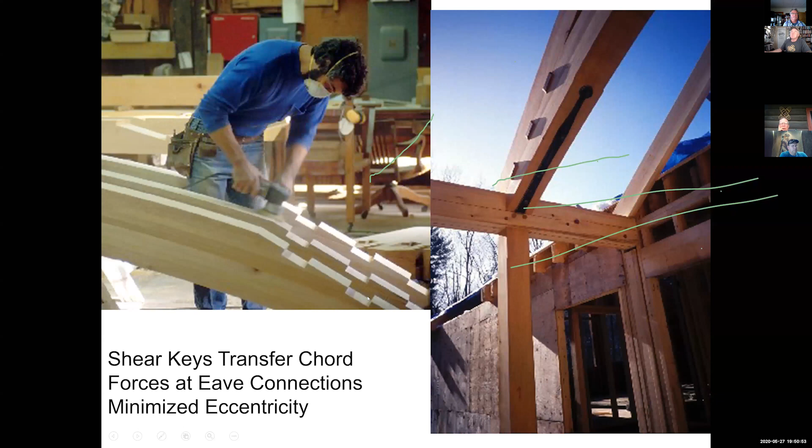And then lots of pegs, and then it's supported in a way here. So this is on the support, not this. This is whittled away on the underside, so this is a pure tension. You don't have as many of them as you do in here, because this is in compression. Although this is not symmetric, it isn't too bad. The line of the eccentricity, that's the line, the center of this bolt, the peg, and this is all pegs through the sandwich. So if you're going to do it, you can do it with some grace in here.

Wood is more compliant than steel in many ways, both in temperature and in moisture. And you can drive interference fit pegs, so the pegs are tighter than bolts. It's sandwiched, so it's hidden, and the tolerances are relieved. So I don't have to worry about whether the pre-drilled hole in the timber is going to hit the pre-drilled hole in the steel. We drill them all at the same point, clamp the whole thing together, drill a bunch of holes, and drive a bunch of pegs. Feels pretty familiar to everybody on this call.

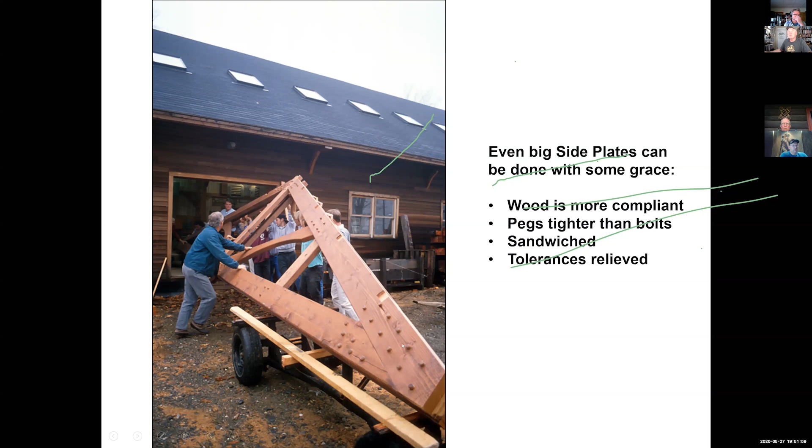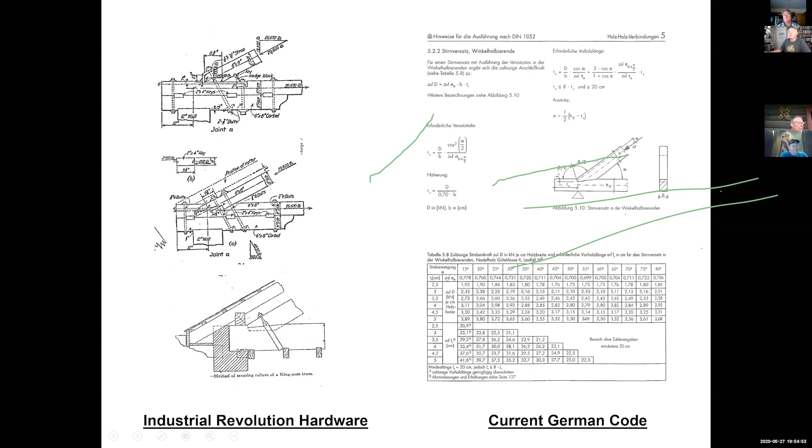So let's talk about this. This is all new—it's been bothering me long enough. Finally, I said, okay, here I am. Let's figure this out. Let's talk about bearing versus friction in joints.

I can't tell you how many times I've got trusses, king post trusses, 12-12 pitch, and we'll use a simple bird's mouth down at the bottom. Then all of a sudden I'll get up to the top, and it's the same force, the same angle of attack. And all of a sudden everybody wants to use this sloped shoulder.

I say, why? I mean, this works so well down here. It's not hard to pull together. You can slide them sideways. If worse comes to worse, you can put them in and then drive the king post down and get this to fit. Just because you're going to pivot this in, this relies on friction.

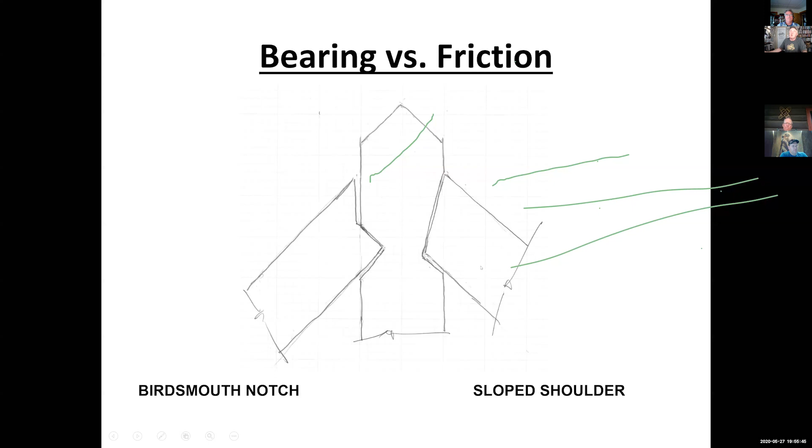Ultimately, at some point, this relies on friction. Let's talk about friction—this is a slope shoulder used as a bearing joint. Now, I see it more recently than I do in old timber trusses. The Industrial Revolution didn't do it. The English don't do it. The Russians never did it.

It's really us who are doing this stuff. So here we are, so what happens? Let's talk about the coefficient of friction.

This is a fascinating topic for Brungrabers, because my father is still alive. He's a PhD structural engineer, and he took a sabbatical once, worked two or three years for the Bureau of Standards and developed a slipperiness tester—the National Bureau of Standards Brungraber Mark II slipperiness tester. This is really it.

He took a bearing pad and tipped a weight over, measuring the angle at which the thing slipped. So what we're talking about is: at some point, if this thing were flat enough, you know it's not going to count on it for slipping. The question is, where's the point between perpendicular and where everybody knows it's just going to slide?

Where is that point? Well, it turns out that's been an issue of interest for a long time. We have this thing called the coefficient of friction, and what it is, is a simple ratio.

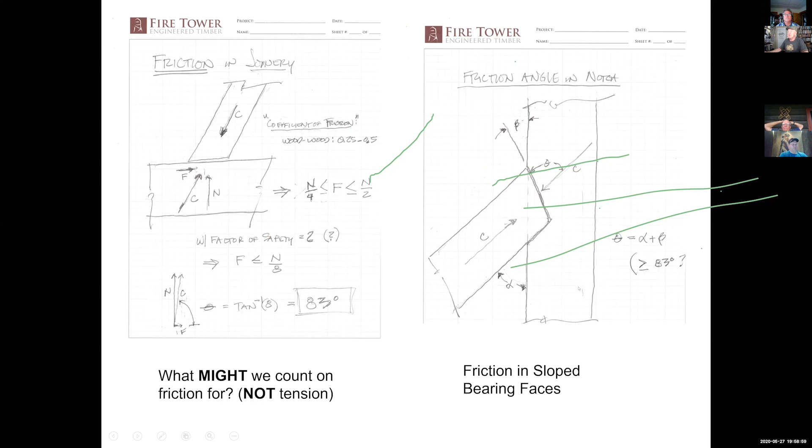I'm sure this is some function of that too, whatever—you'll figure it out. Anyway, alpha plus beta has got to be bigger than 83 degrees, and I'm convinced this is true. So you go back and look at your slope tenons, add this number to this number—if you're above 83, you're fine, or feel free to go mess with your factor of safety, help yourself. But check these things out and see if you are indeed counting on friction to an unreliable extent.

So let's talk about some stuff that I see more and more. I don't see this in the Industrial Revolution. I don't see this in the 100-year-old Russian stuff. I see this in modern timber framing.

I understand why people do this—they say, well, it's triangles, it looks like a truss. As a matter of fact, I've done this. I've even done this, and I've certainly put my stamp on a lot of it, but I've got to tell you that I'm concerned, and we pay a lot of attention to this joint.

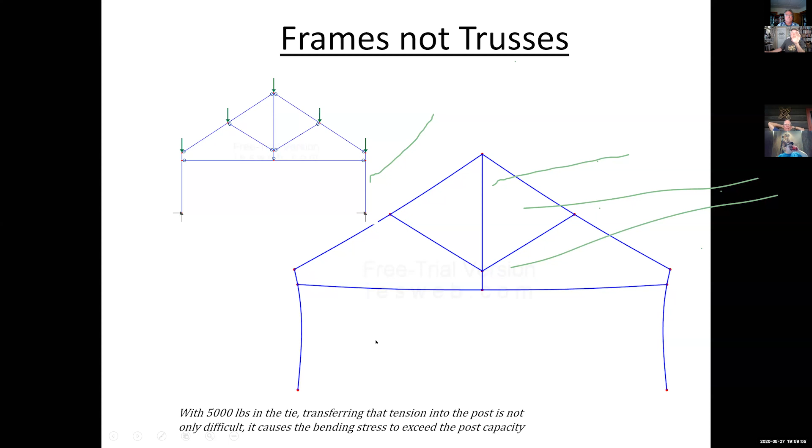If you think that's not a problem, look at this. This is about 36 feet. I don't know who's actually involved, but it's a hotel in the south. There it is, look - there's a sort of scissors truss, sort of cathedral-y looking thing with corbelled braces. There's a big gap between the top chord and bottom chord, cranking on these posts. When I get pictures of this thing, this is what I'm looking at.

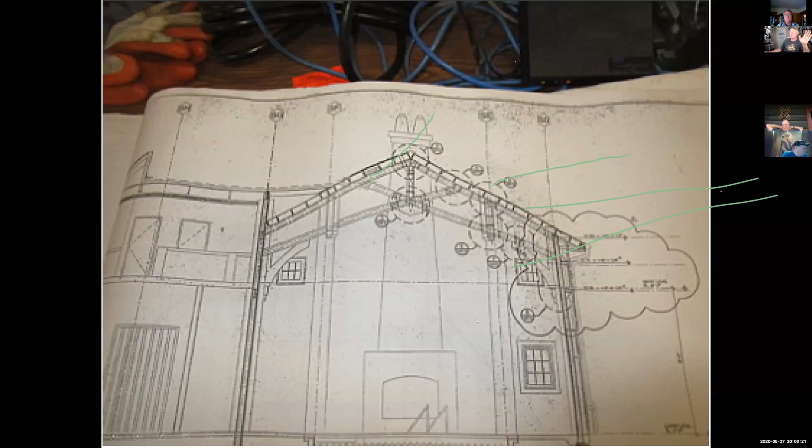I've seen worse checks, but I can't tell you where and when. That is not good - that's more than screwing that together, that's bolting through bolts together. This is a serious problem, people. This is really what happens when you push hard here and pull hard here and push hard there. You're going to get this sort of stuff sooner or later.

So the question is, where are you in the continuum? If you're up here, maybe you're getting away with it. If you're doing a good job of grabbing that post with this bottom chord, maybe you're getting away with it. If you go here, clearly you've got a problem. So you've got to ask yourself, do you feel lucky?

Not only are they... this would have been so easy if you just raised this up and put a notch here that hit it here. This would have been a fine joint, landed on here. But now you've got to raise this thing, assemble it in error, assemble this and pick it up without wrecking this. When you can't do much at all without splitting that top chord, splitting that post, splitting this into a splintering mess, you've got a problem.

I look at this timber, and I used to have a rule of thumb. At first I said, if you can't drop a timber off a waist-high bunk without busting the tenon off, you've got too much tenon or too thin a tenon or something. My other rule of thumb is if you can't pick this timber up by the connection - I'll let you have both pegs in here - if you can't pick this timber up by those two pegs that are in there, you do not have a connection.

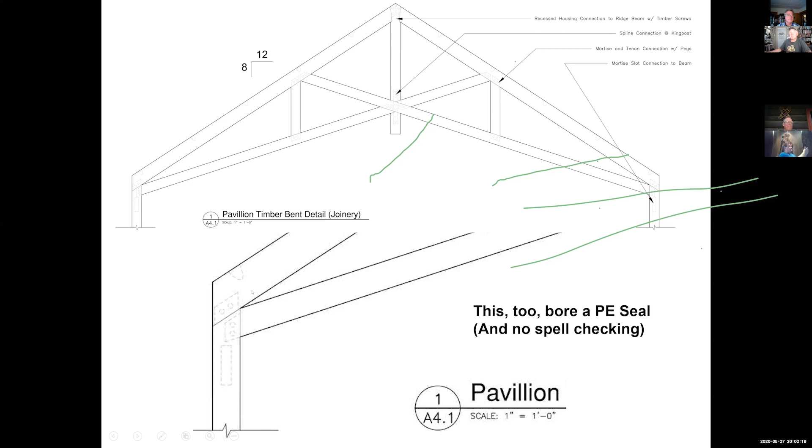I don't know. I'm glad this isn't a heavier light fixture or a big fan. Anyway, you see this all the time.

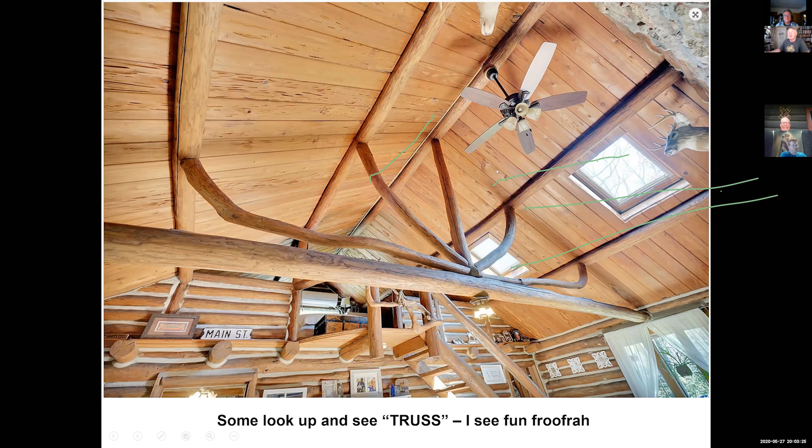People see this and they say, oh, I want that. So Brad Morrison, I hope he made the call. Brad Morrison asked me to do this, so I said, I can't talk about trusses without talking about these things.

Dick Schmidt and I had the great honor and pleasure of going to see these things. There's way more truss action going on in these timbers than there is in the typical Hammerbeam frame, which is a frame, not a truss, I'm convinced. There's so many members in bending. All of these members, in the scale of this building, are mostly axial members.

These are arched trusses. This is hangar number 2. There's an identical one right next to it, hangar number 3, at Moffett Field in San Jose.

Hangar number 1, for those who are interested, is steel and was built during the dirigible age. The first one was steel and built during the dirigible age.

And you know where the word blimp came from? Quick aside here. There's 2 kinds of LTAs, lighter than air craft. Type A, which is rigid, dirigibles, and Type B, which are limp. Type B, limp - and there comes the word blimp.

So along comes World War II. We're worried about submarines, and we're worried on all 3 coasts - the West Coast, the East Coast, and the Gulf Coast. And you can't send planes up and have them hover there watching for submarines.

So it was a perfect application for blimps, but it turns out, because blimps can stay up for 3 or 4 days, their operating range is about 500 miles. So every 1,000 miles along all 3 coasts, Gulf, West, and East, we built a pair of these hangars to maintain and protect them during storms. We basically built 3 entire coasts of wooden fortresses in less than 2 years.

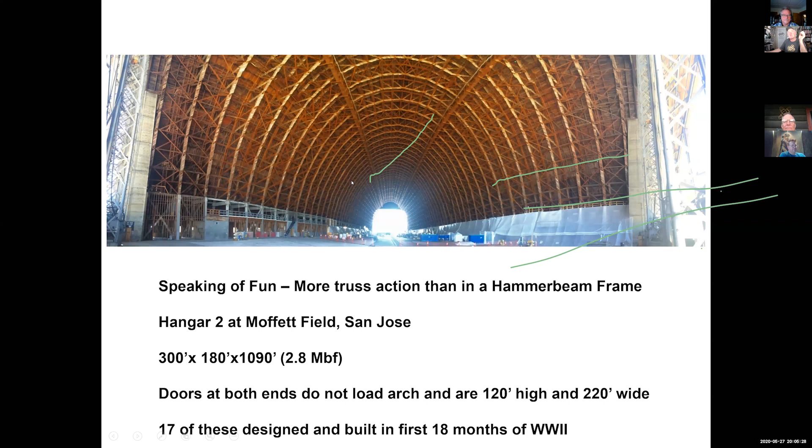These things were designed and built in the first 18 months, if you can believe it. When they were getting good, the erection would take less than a month for each one of these things.

And when you're up here looking down at the chassis for this rolling platform, it looks really small and completely... how heavy can this be? Is there a huge magnet in this thing? And this is a concrete slab. It just doesn't compute, but it worked, and I'm glad I got to do it.

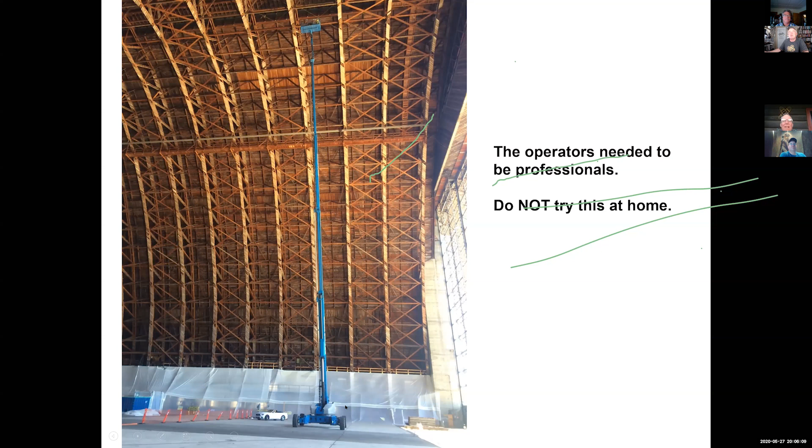This is one of the reasons we're here - minor dips. There's a minor dip in the ridge, but that ridge is 1,100 feet long, so it's not minor when it's 1,100 feet long. They were worried, rightfully worried.

Look at these, these are the box beams. This is how they isolate it. The doors slide through this slot, roll on tracks at the bottom. They're slip-formed concrete, 4 piers at each end that hold up. This is a box beam timber lattice truss, with timber lattice that are 220 feet long.

It's a box lattice truss that is loaded. All it supports vertically is its own gravity load, maybe snow, but more than anything, it supports wind load on the top half of this truss. So it's loaded more horizontally, so it's a box truss.

220-foot span - in the context of this building, it looks like nothing. When you're in this, it's like a 20-foot wide cube, 220 feet long, surrounded by 4 Town lattice trusses. You are in another world, and you're 120 feet up in the air. Boy, am I excited about this building.

Anyway, look at this dip. There it is. And so it was dipped, and they needed to prop it up.

Rather than just fill it with staging, which I sure wish they had done, they went out and found somebody who could walk into a building that was falling down around their ears. They were starting to find big pieces of wood lying on the floor way down here.

So they had the first safety meeting in a 20-foot container with the whole crew, and they said, we figure it's going to take 14 seconds for this thing to collapse. So when you're up there and you start feeling it collapsing, you've got 14 seconds, and our plan is to come down and race into this storage container, which we think will withstand the impact of all this landing on our head. You can see all the repairs that have been done to this poor thing over the years.

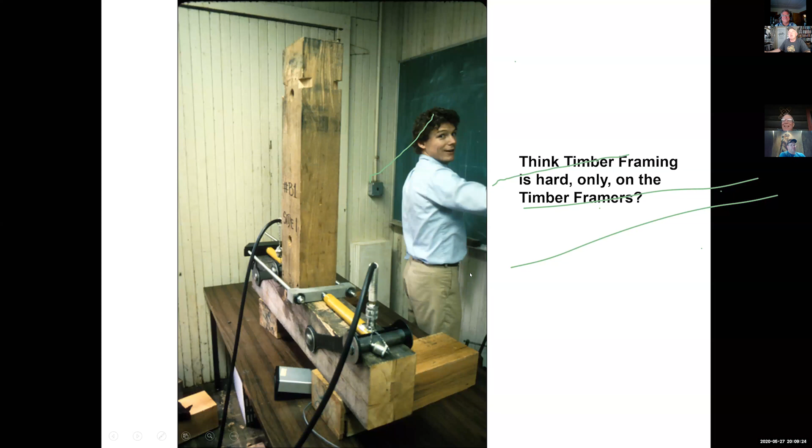So I promised Mac I'd get him back, here it is, there's Mac at Stanford. He helped me do some of this, a shear test. And I think you guys sit there and think it's hard on timber framers, look what that does to the engineers too. That's Mac. What is that, 3 years ago? Okay, maybe let's say 35.

I offer this for all of us who are out there and you're looking to hire an engineer, and you're worried about how scary they are, or how big a trouble they are to you, and you're looking for their boldness ratio. I'm convinced we look something like this: as we come out of our various degrees, we're pretty confident we know what we're doing. Then we start to see things go unexpectedly awry, or the child's tuition bills start kicking in, or a mortgage payment, or a truck payment, and you start getting really conservative in these years, 35 to 45, 55. And I'm right in here now, so I'm well into the scary zone up in here. So I offer that to you if you find yourself wondering, well, have I got the right engineer for this job or not?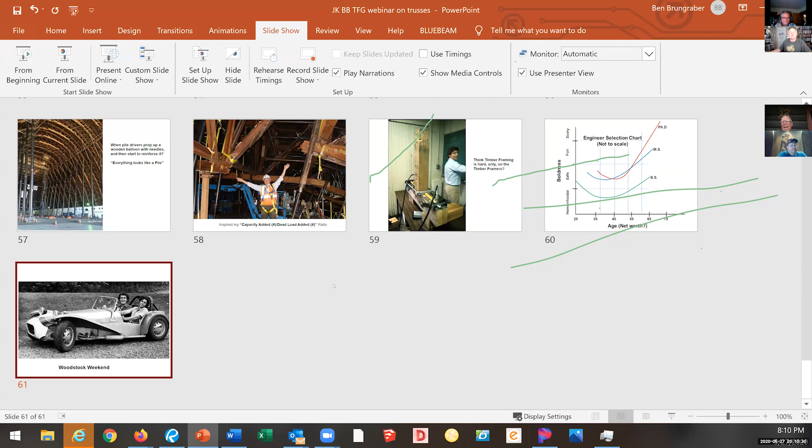And how am I doing? 10 minutes over, holy smokes. I got yacky. You're doing great.

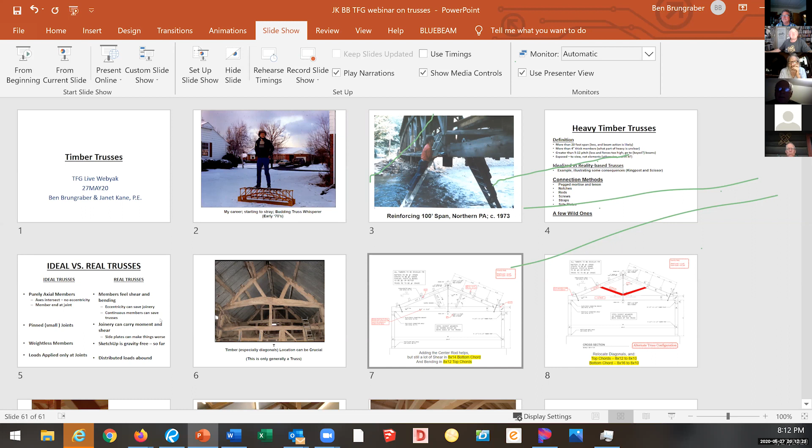Hey Ben, go back to that smooth scissor truss and talk about the guys that try to build that curved member out of solid timber. What's that all about? Are we talking about this one? Yeah, the one with the glue-lam curved bottom.

There you go. I've got slideshows where I've given this where people saw these things. What happens is it completely denies the fact that wood, typically speaking, is a straight grain material. Particularly down in here and up in here, I don't have much grain holding that. That's just a little triangle of floating wood, and this is frankly just a long triangle of floating wood. So really, if I cut this out of a curve, I'd be happy if this piece of wood didn't fall off, let alone carry an awful lot of tension.

So when people start sawing these curves, I say, show me what you're sawing it out of so we can assess whether we're at least keeping some wood that goes continuously from here to there. You're losing it on the top of the outside and on the inside of the inside. So I want to see at least some wood, and a lot of times I'll have to put a rod in there. There simply isn't enough, and if they don't want to go glue-lam curved, and I don't blame them, then they want to do that instead.

But I've got all sorts of pictures where I've got splits right through here, right along the grain, because that's what wood does. There's splits right through the joints, and then you have to reinforce it all and put it back together. Does that answer your question, David?

Yeah, I thought it would be helpful just to point that out, because I get a lot of requests for doing that, and I have to go through the same drill you do, talking about glue laminate or tension rods. Because when you have grain run-out, you have eccentric loading, and then you have splitting, and then the thing falls apart. I've got a college buddy building a place out in the vineyard.

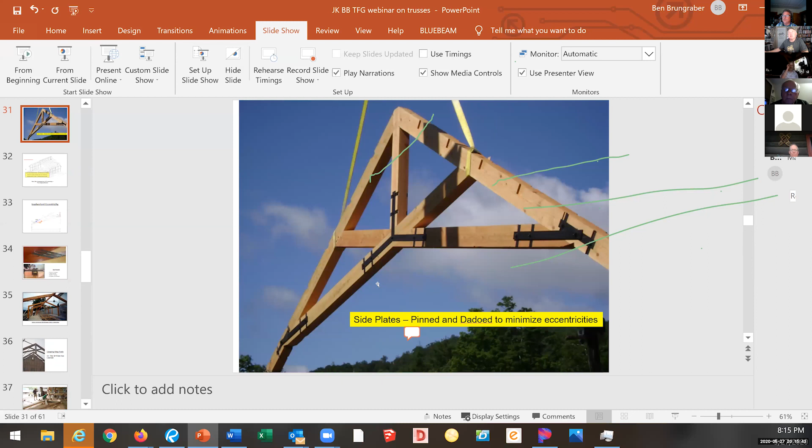And we do have a question from Morgan. I'm not sure I understand it, but perhaps Morgan can jump in and explain if you don't understand it. So I'll just read it: For your slope shoulder connection, could you use some of the internal shear of the top chord so that you don't need to rely on friction only?

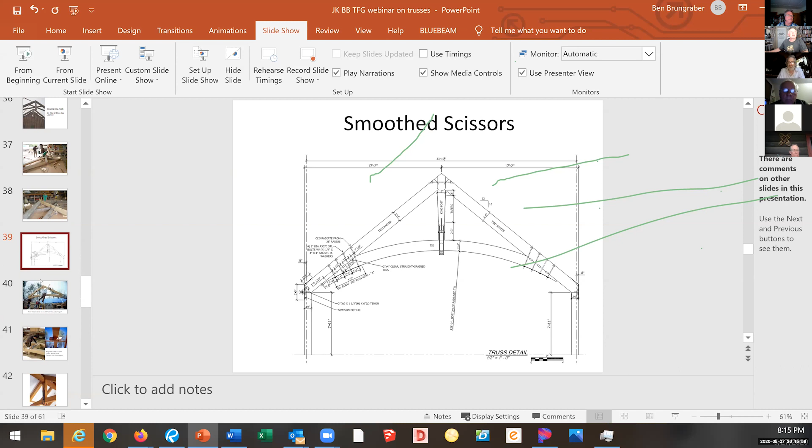Yeah, I mean, here's what happened. Where did I do that? I got to look over here. Where did I do that? Was that up here? No, it was way down here. It was late, I think it was later. Yeah, friction. Yeah, late. Oh yeah, here you go. All right, yeah, I mean, I've all right.

So I've seen ones, I think Morgan's saying, what about a tenon in here? And sure, that's actually, when I let people do this, I have a tenon in here. Now here's the problem with that tenon, is that you can't see - usually it's back cut, so I can't see if I've got good bearing. So I really have to have faith. And if it's bearing, then this is maybe not bearing. You're trying to share a load between this stick and this slope. And the odds are good that it's probably on this stiff, but not if you didn't cut it right.

It's really, now I've got two potential load paths, and I'm not sure which one it is. But I can imagine one where I undercut the tenon, so I got nice sliding, I got a nice tight fit here, and I left a quarter inch gap in there. All of a sudden, whatever reason, maybe a little lighter load and this thing bounced out because the load reversed, it slips, bang, and slams into - all of a sudden that tenon, this thing starts to slip out, bang, slips in and hits that block of wood up in here, that secondary load case, and that's a sudden jar.

And now shear, shear forces can impart brittle and sudden and complete failure. So I'm not wild about it. It's very difficult to cut this joint, period, let alone cut it so that you got uniform load sharing, because this angle gets tighter and this angle gets shallower. This thing wants to open up gaps left and right as these two members change shape. It's a little tough to predict. It's tough enough to get a nice uniformly bearing, consistently bearing connection.

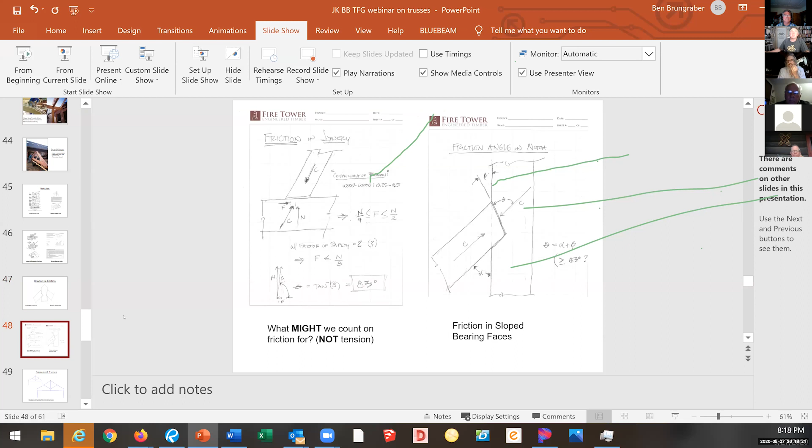Some of my gravity load, I wish I could give them the pointer. Is this a better one? Some of my gravity load is coming. Well, I'm sorry, Morgan, I'm not. Morgan, do me a favor and write to me separately, will you? Or even call me, I'm not that hard to find.

Hey guys, can you hear me okay right now? Yes, Morgan, go ahead. Okay, here we go. Sorry, my mic wasn't working there.

Yeah, I guess what I was getting at is that you've got sort of internal shear coming out of your top chord into that connection. Sort of your gravity loads are pushing that top chord. Yeah, there's a shear, there is a shear plane here. You are, if you actually succeed in biting into that surface, you are trying to shear that block of wood off along that plane, is that what you mean? No, I guess I'm not explaining myself very well. I guess there's part of the loads that are applied to the building that are keeping that slope shoulder in place, are they not? The vertical loads that are being applied to that top chord?

Well, this is a little vague. For all we know, there's a huge ridge beam in here, and there's no bending load applied to this at all—it's all ridge beam, and this is being shoved down through these two sticks. You need context to understand the loads that are in here.

Ben, this is David. It's always made me feel more comfortable if there's a binder bolt horizontally across the joint to hold everything together. Yeah, I like that too, to squeeze things together. It's in single shear, and people usually make it a sloppy fit so they can get the thing through there. It's really handy during raising, so you can put straps in here and pick the thing up without pulling it apart. So I'm into the binder bolt. I'm with you.

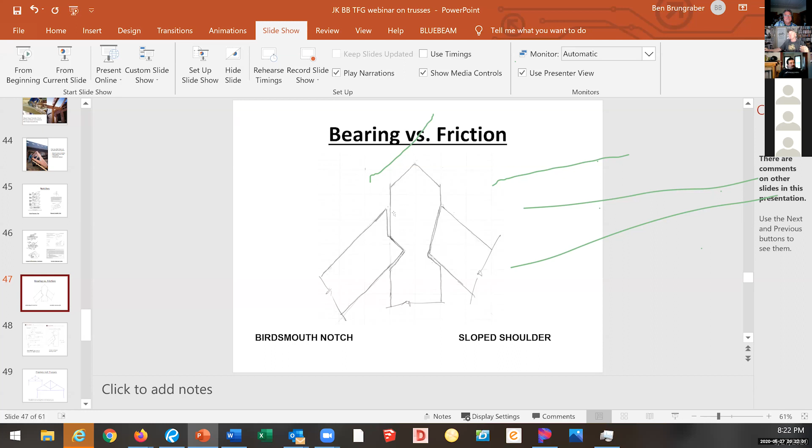There was one other question, Ben, that I thought you've touched upon—the effect of moisture content on the design of the truss, knowing that you're working with green wood. I went through a period where I said no more wet timbers in exotic, heavily loaded trusses, because what happens is, just like this would shrink, it goes this way, it doesn't go that way. This timber gets smaller in this direction, but doesn't change at all in that direction. So that angle becomes more acute. So your angles change, and that's one of the reasons the Europeans do this.

That's one of the reasons the Europeans bisect that angle, is to cope with that—so at least they're changing the same amount. You're not getting away from it entirely, but it's the best you can do to deal with the fact that your bearing angles are changing as you do it.

So, wood is a wonderful material. There are many reasons I'm in this field, but one is that it's compliant—it allows us to get away with some stuff, so that when this angle gets tighter and the bearing pressure gets really tight, the gap opens up at the top. What happens is the two fibers, particularly interstitially when you have the two bundles of straws, you don't have uniform bearing—you have a bunch of raw ends of straws bearing on the ends of a bunch of raw ends of straws. Those actually crush into each other more than if you take it differently. That's a more crushing surface.

That joint, let me look at this—that joint right where you're getting end grain bearing on end grain, you'll get more crushing deflection in here than you do in this one, because in this instance, the ends of the cell walls are crushing by you. So on a micro level, you've got very intense stress concentrations—the edge of the cell bearing as it runs across the end of another cut edge of a cell.

So these are compliant, and that's saved an awful lot of trusses. So when this angle changes and I start getting more bearing down here, it crushes in and distributes the load. Did that answer the question? I think it does. It's one of the reasons that you'll see this angle and that angle—many times they'll split it.

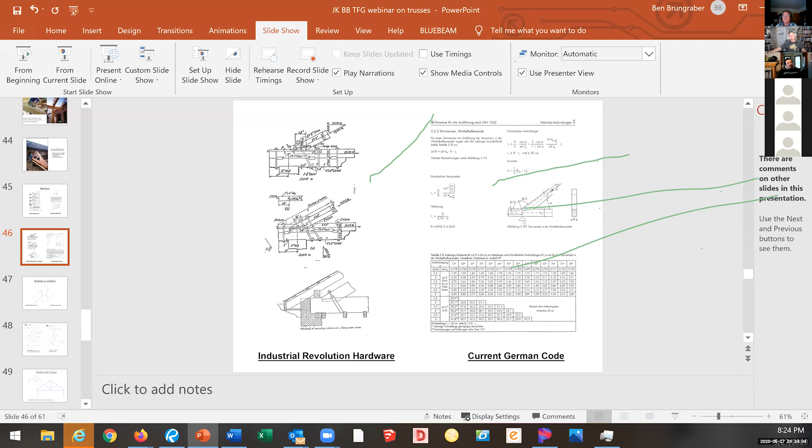Well, I don't know, I think a notch is a compression joint. I beg to disagree. I humbly disagree—I'd say that to the extent I talked about notches, that's a compression joint.

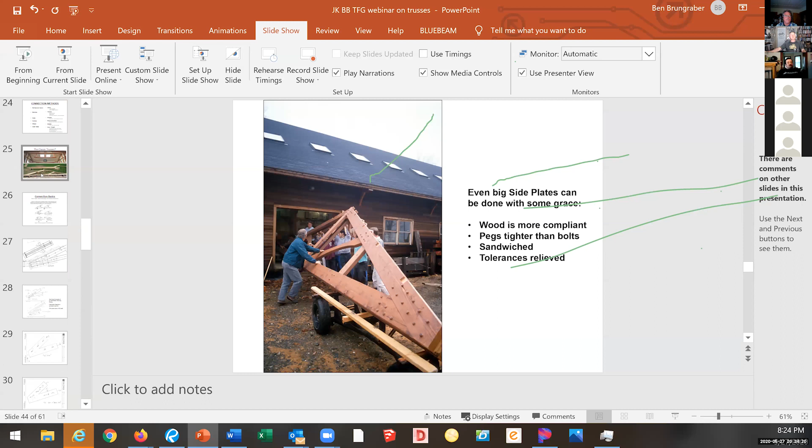If you want to characterize connection methods, mortise and tenon does a lot of different stuff—doesn't do it terribly well in any direction, but it's a good compression joint. Notches, that's all they are—compression only, right there.

Rods, on the other hand, I didn't talk about much, but I use them—the Industrial Revolutionists used them. Screws are pretty much tension, but you can use them to generate shear across a connection. Straps are tension, and side plates are a mess.

So to the extent I tried to balance notches with rod screws and straps, I don't know—what did I say in a casual way that made it sound like I treated compression lightly? I'm sorry, I didn't mean to imply that you did.